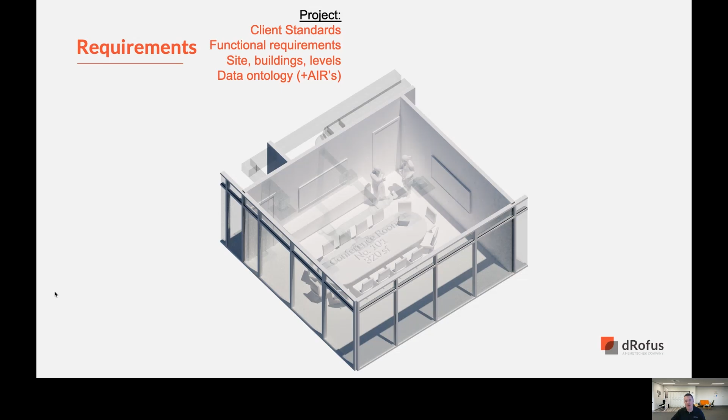This is very relevant today, of course, as asset information requirements together with OIRs, EIRs, etc. are key to project delivery.

Most projects start by first defining the site, building levels, and the key functions within the building, the key spaces required to perform those activities. And this data guides what the architect designs. Usually it needs to be compared against and tracked throughout the different stages, that golden thread as we mentioned earlier.

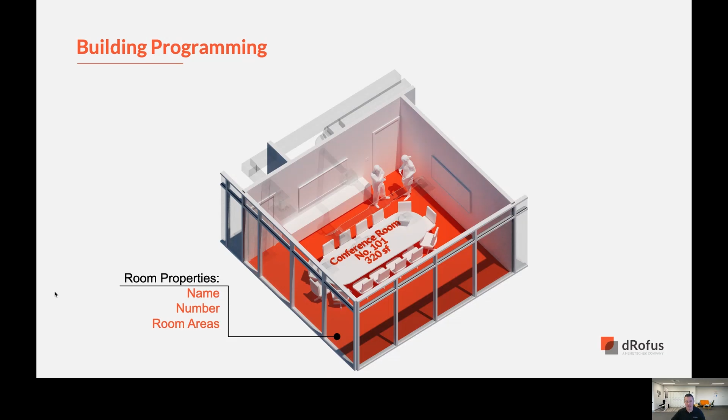The contents of the room in terms of AV equipment, furniture, lighting fixtures, carpet, walls and ceiling finishes, etc. We capture all of this, not only in terms of the planned quantity in each room, but also the specification of these items and the designed or modeled quantities as well. We have a bi-directional, somewhat symbiotic link with the models.

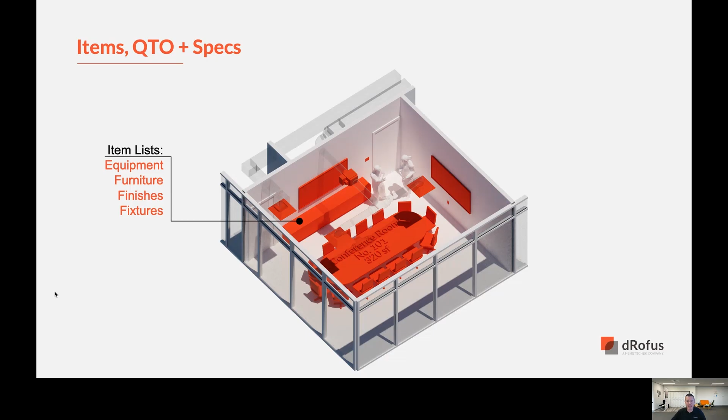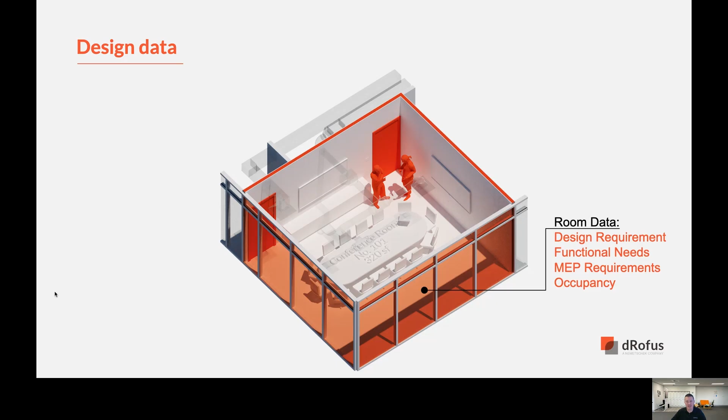Design requirements such as the proximity or relationship to other rooms, daylight requirements, occupancy numbers, temperature ranges, etc., which in turn affect system design, we provide a way to capture all of that information collaboratively.

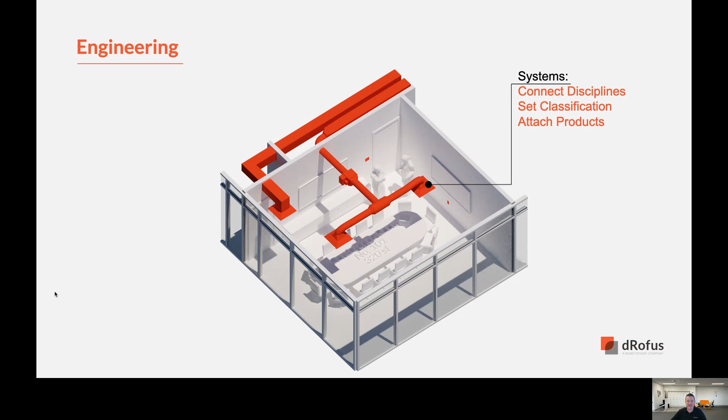MEP systems can be planned in dRofus or imported from the model. What we often see is that these systems may not be fully modeled, or that there's perhaps data missing, such as the classification. Maybe the link between the systems also hasn't been captured, how an electrical system connects to a HVAC system, for instance. So we're able to plug these information gaps and, where necessary, synchronize that data back to the models.

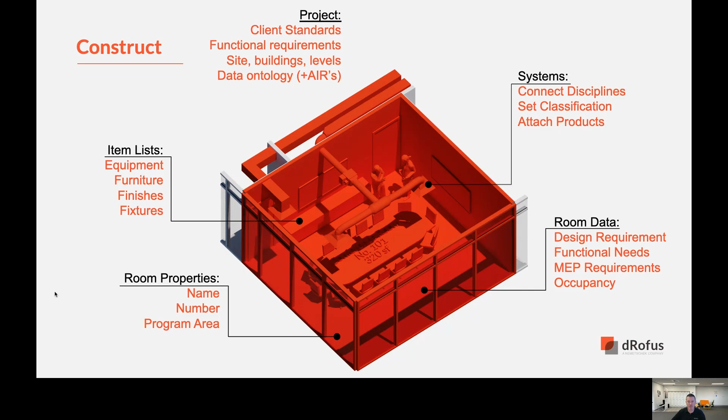So you're building up a complete picture of everything that's required to plan, design and construct the facility based on the collective data or knowledge of the various stakeholders. And all of this data, as I mentioned, is linked to the models, but without the need for the data to live inside the models or to have been authored there.

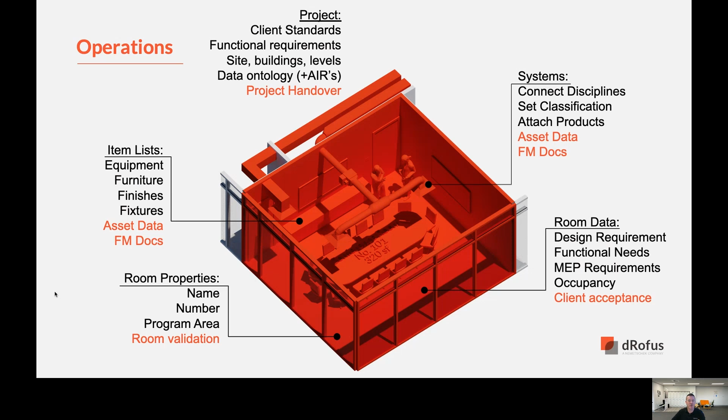This buildup of data also enables various downstream tasks, such as commissioning, validation, capturing of asset and product data, plus the associated FM documentation. And this in turn leads to a comprehensive information handover from the project team to the operations team. Or better still, linking that golden thread, your golden database, to the BMS and FM tools.

These days, software systems need to connect with others through direct connections to other software platforms, but also via APIs. So you can do fun stuff like building intelligence dashboards. You can even embed dRofus into other applications, such as field BIM type systems.

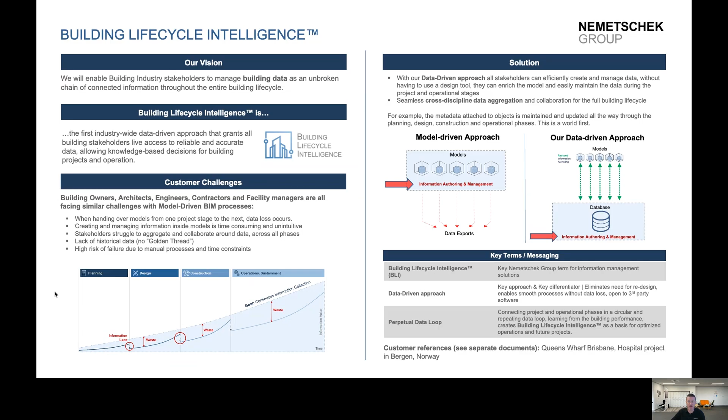So our core message is to make data the foundation of your software ecosystem. Models and documents are, of course, important, but deriving everything from a model limits your options. Using data as the backbone to connect all of your openBIM systems, we feel is a much better approach, as do many of our customers who are now speaking publicly about this.

I was fortunate to introduce Building Lifecycle Intelligence at a buildingSMART event roughly a year ago. And this video is available through buildingSMART's Vimeo channel if you're interested in looking that up.

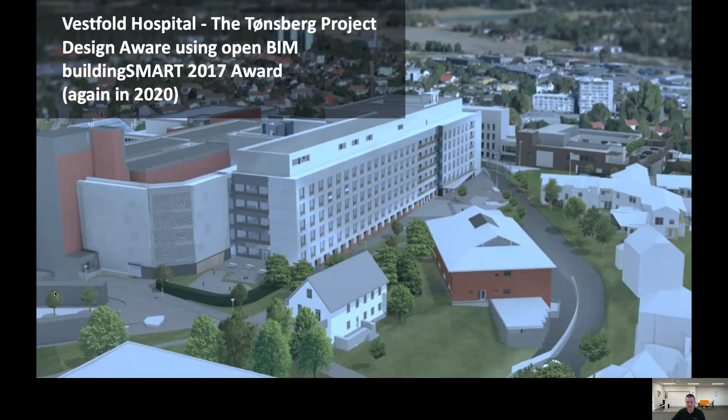I mentioned that in 2017, a dRofus customer won a buildingSMART award. Also in 2018, again in 2019, and at the time, there were several contenders for the 2020 awards. I'm pleased to say that Auckland Airport won this, who for us are a very new but also very interesting customer. They share our vision around using data as the foundation of their asset management activities.

So we realized we had to start sharing these stories. We've actually created a sort of TEDx style series of webinars branded the Innovator Basecamp. So you can hear from the likes of Auckland Airport and several other of our visionary customers about their projects and their approach to building lifecycle intelligence.

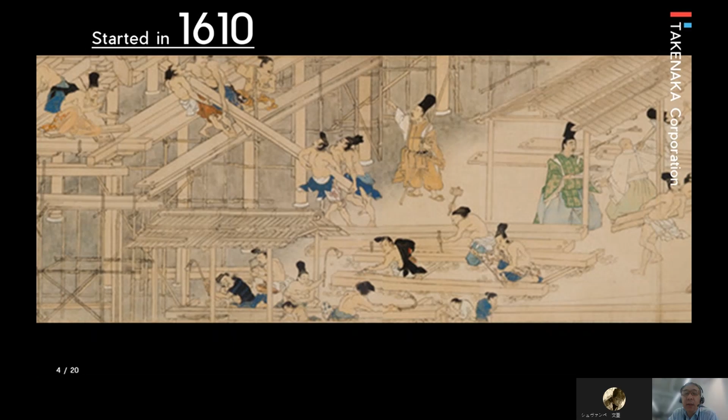Takenaka started in 1610 as a master builder, building shrines and temples. The picture illustrates the construction site in that era. The person marked with the box is a Toryo, a master builder. Master builders did everything: consulted with clients, did sketches, calculations, and managed construction. This is the background of Takenaka.

Unlike other general contractors, they are exclusively focused on building construction, no civil engineering projects. Adding value through BIM implementation, we try to improve our service and call it Takenaka IPD. We try to push it further to achieve data-driven design build in the near future. This is what we are engaged in to make the Toryo system of the future a reality.

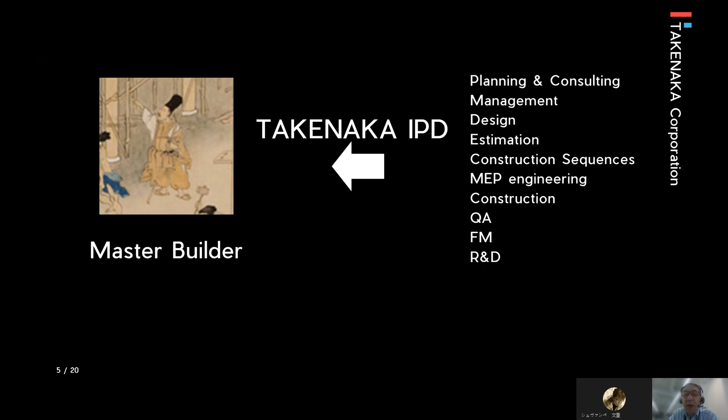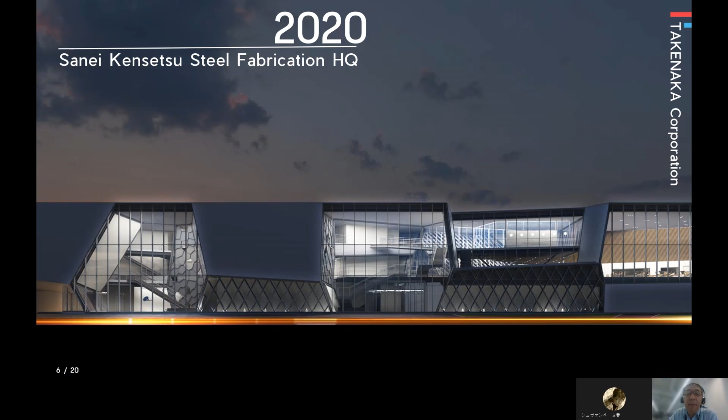Their requirements are: first, better communication within the headquarter office. Second, a workplace which can motivate workers to change their mindset to be innovative. And last, the building should become a showcase for their technology.

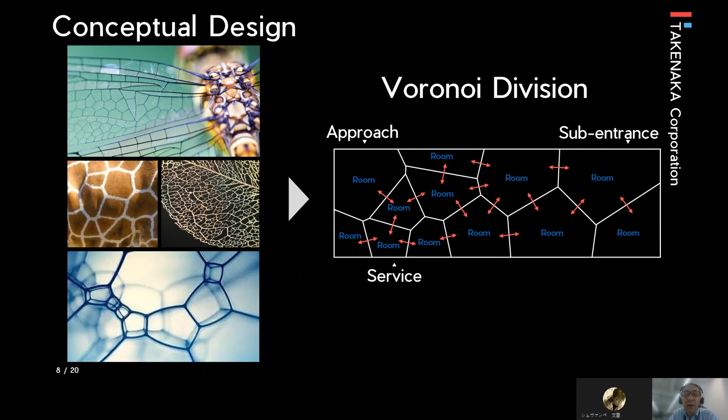You might have seen such a division rule seen in nature. It's called the Voronoi division. Our team used this rule to create a new relation between the rooms inside the rectangular box. This shows how it is divided.

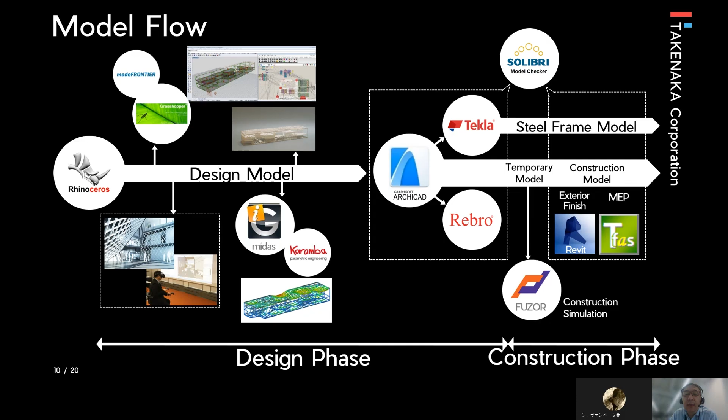Model flow in this project: Rhino to create the form and ArchiCAD to complete the schematic design. This building was completed in 2020. Since it is a showcase for Sanei, anyone can visit to see how it looks. Please take a look at the video of this project.

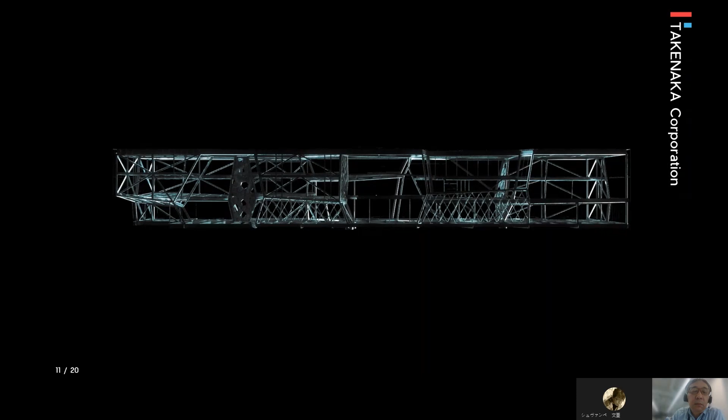Each discipline, each department team makes models separately. Once the construction model is ready, it is distributed to vendors so that they can make their own models to fabricate. The facility management model is created by the end of construction for maintenance as an FM model.

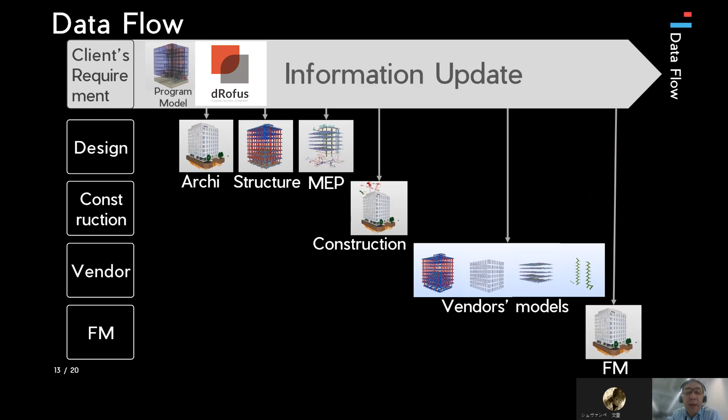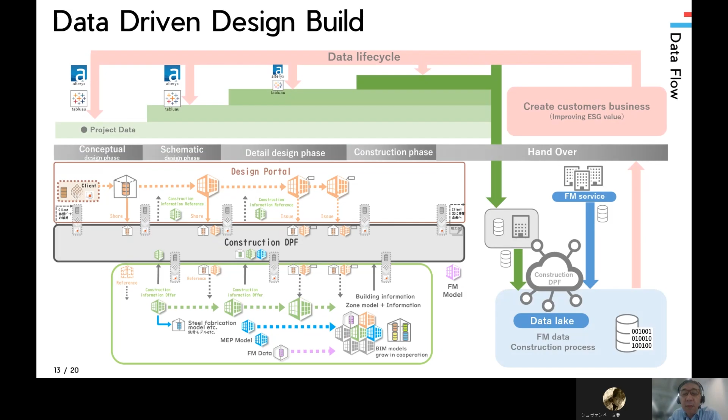Takenaka aims to become a data-driven company in the near future, which means data will be stored in a data lake in order to reuse the data for each project. Also, by integrating the customer's FM information, it will enable us to provide new value-added services to our customers.

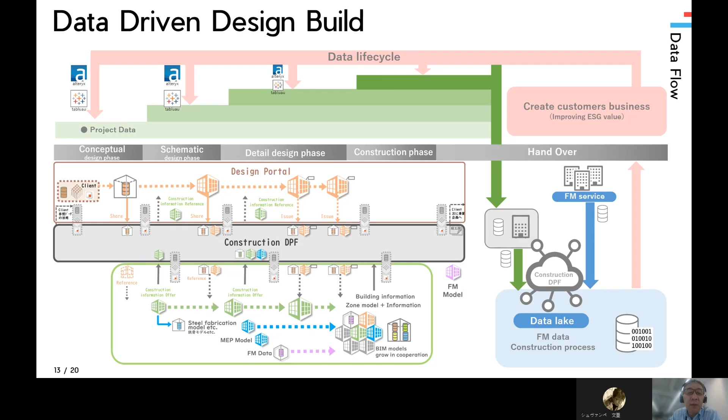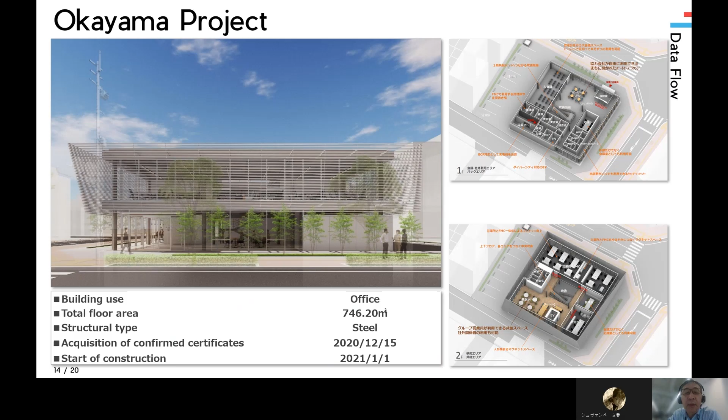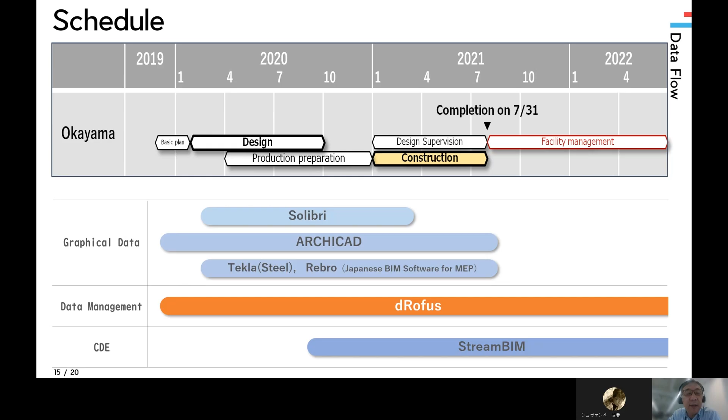The data is used from the early design phase throughout the construction phase and even into the FM phase. We are building an ecosystem using several software packages as a common data environment using openBIM.

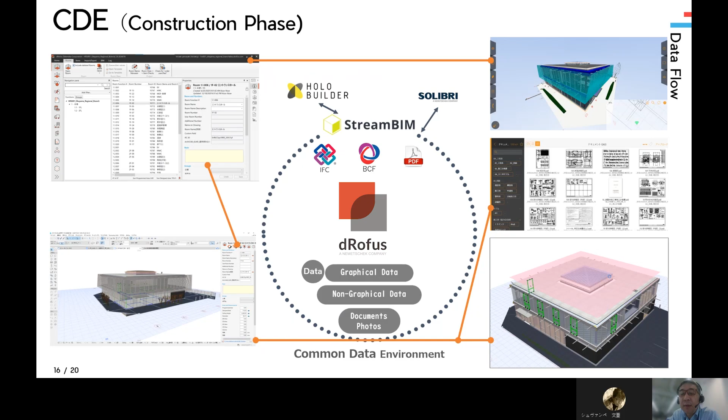There are three major types of data to be used: graphical data, non-graphical data, and documents. dRofus plays an important role as a system which handles non-graphical data and is the platform for all project-related data. The information controlled by dRofus is synchronized with ArchiCAD and other authoring tools, and the information is then used in Solibri and StreamBIM.

It's important that all the stakeholders are managed with proper access control in a common data environment. As I mentioned earlier, this project is already in operation, and we continuously work on maintaining and operating the data under appropriate access control.

We would like to develop the data environment built around dRofus from the early design phase as a platform for long-lasting building lifecycle.

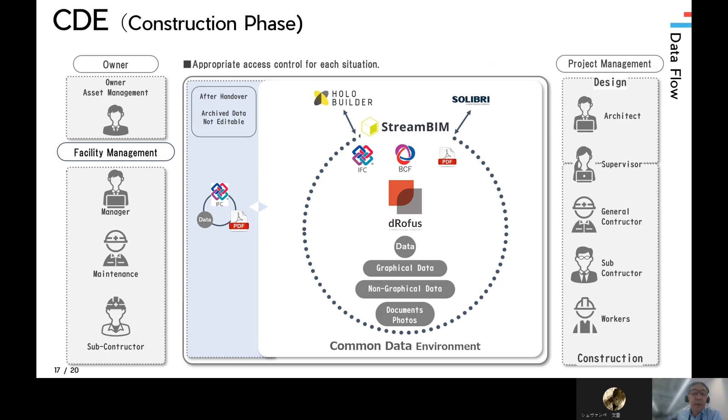Especially with customers, we communicate digitally using StreamBIM, which allows sharing of models and information. We use dRofus as a building information database, which includes asset information, and share the information as well.

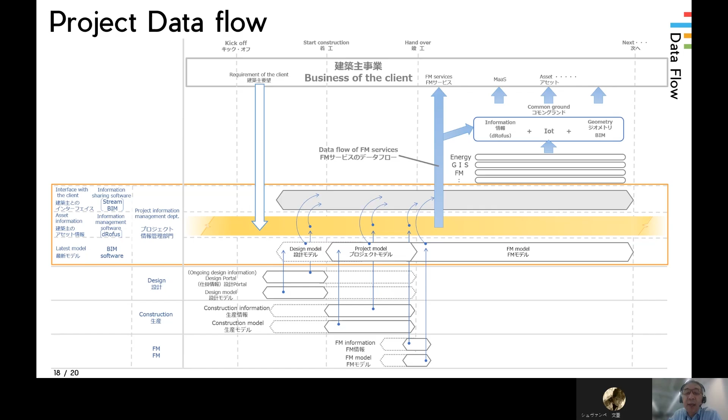A trial is underway to set up a project information management department. That way, models and information can be used by all parties involved, regardless of whether they are in the design, construction, or FM phase.

openBIM is the most important concept for us. The construction process involves more than 100 parties throughout the process. We use StreamBIM as a platform so that anyone can participate. Also, we use dRofus as an information management tool so that everyone has access to project information.